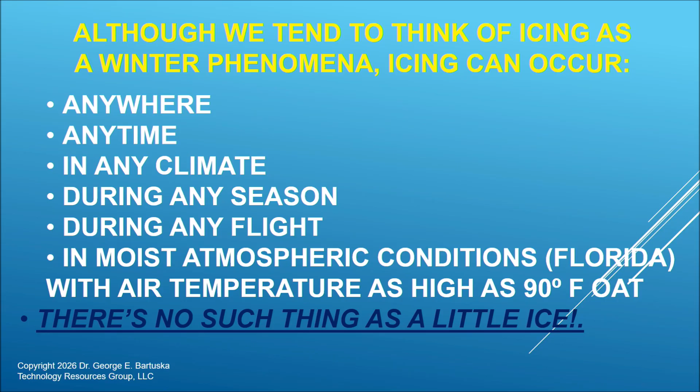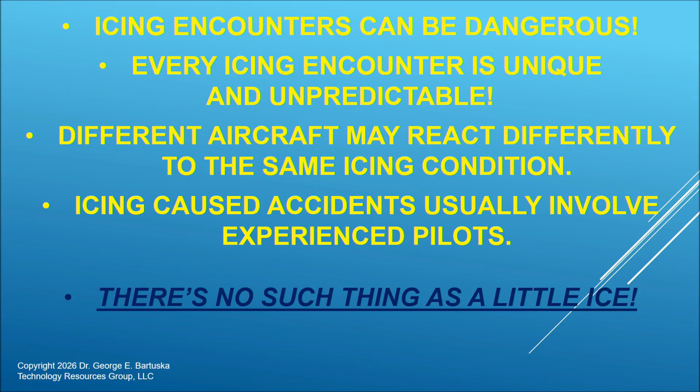Icing encounters can be dangerous. Every icing encounter is unique and unpredictable. Different aircraft may react differently to the same icing condition. Icing-caused accidents usually involve experienced pilots. There's no such thing as a little ice.

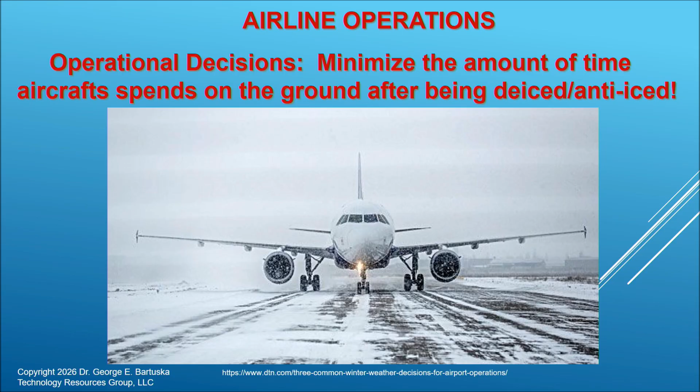Now the airlines, they just want to get going as soon as they can. They minimize the amount of time they're on the ground after being de-iced and getting their anti-ice systems running. But in the case of general aviation, you, the pilot, have complete responsibility for the go, no-go decision to fly based on your training and the best information available.

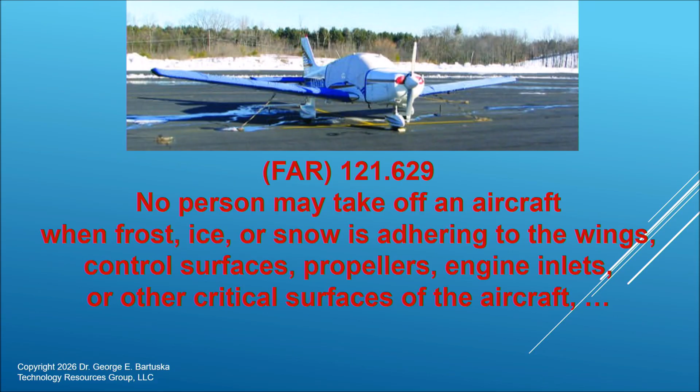We need to quote FAR 121.629: No person may take off an aircraft when frost, ice, or snow is adhering to the wings, control surfaces, propellers, engine inlets, or other critical surfaces of the aircraft.

As was illustrated in the NAFI Summit in 2023, there are 1,200 accidents average a year. Of those, 220 are fatal. Weather is a factor in a quarter of all those accidents. However, you can miss every weather question on the FAA exam and still pass, at least at the time this presentation was created. Too many times there are informal discussions like, well, we'll figure it out on the way.

Remember, if things don't look right, if you're hesitant, park the plane and take the train. Or when in doubt, sit it out. There are gaps in weather knowledge in the general aviation community. You need to learn the weather before it's too late, and that's one of the reasons we're here.

Now, I always quote John and Martha King from the King Schools. They always share this story when they talk in public. They were flying their Cessna 210 in the winter to Sioux Falls. They had a generator failure. They didn't stop to get it looked at. After flying almost 4 hours above the clouds with a dead battery, no radio, it started getting dark.

They had to put it down somewhere through an 11,500 foot overcast. They tried 3 times, experienced 3 icing episodes, started to worry about running into a TV antenna. Finally, they broke through the clouds, saw a highway, saw car lights, but saw a lot of power lines. So they ended up in an ice and snow covered cornfield, and luckily they lived. Later on, they found out it was just a loose wire, so if they had stopped, they wouldn't have had to go through any of that.

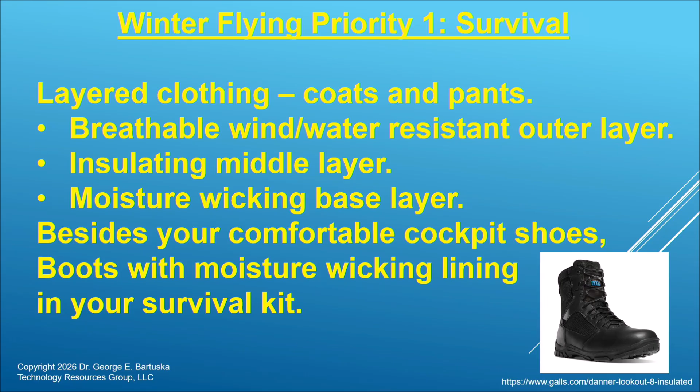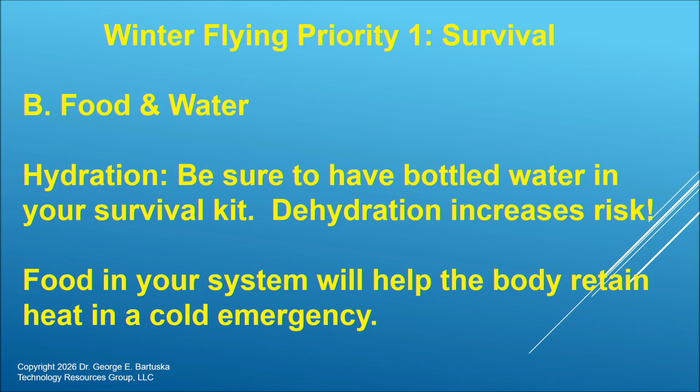Besides your comfortable cockpit shoes, make sure you have some boots with moisture wicking lining in your survival kit. Also make sure you have food and water. Hydration, be sure to have a bottle of water in your survival kit along with the other water you bring, and have food in your system to help the body retain heat in a cold emergency.

You want to make sure you have at least one fully charged cell phone, a flashlight with new batteries and extra batteries, some high energy food like protein bars and nuts, and some states, as we heard earlier today, like Alaska, have a specific requirement for what has to be in that survival kit.

Most of us have heard the 6 C's of survival. Number 1, have a cutting tool. Number 2, something to start a fire with. Number 3, something to make a tent, like a tarp. Some kind of container, like from your mess kit. Some kind of cordage, like 7-strand paracord. And in addition to the cell phone, something to communicate with, like a satellite phone, and a plastic mirror to serve as a signaling source.

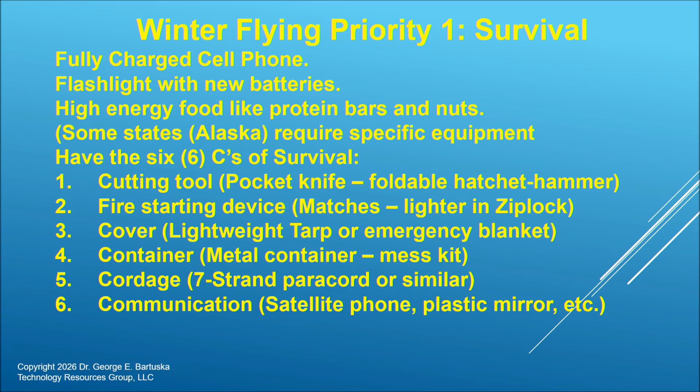Your pre-flight checklist. Check your tires. When it gets cold, the tires are going to drop in pressure. Snow and ice removal: make sure you have a brush on board and a scraper to handle any snow and ice. Aircraft openings: we're going to talk later about the pitot tube, the static ports, the heater, and the carburetor intakes.

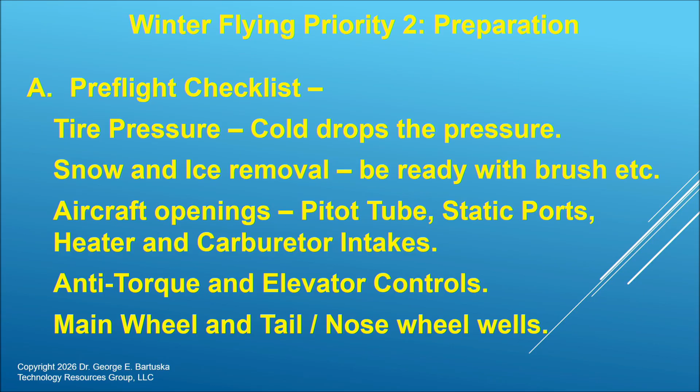Make sure the anti-torque and elevator controls are clear, and the main wheel and tail and nose wheel wells. Make sure they're clear. Now, static pressure ports.

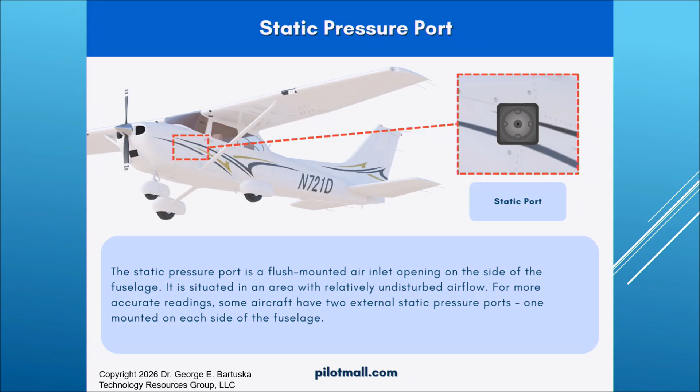The static pressure port is a flush-mounted air inlet on the side of the fuselage. It's situated in an area with relatively undisturbed airflow. For more accurate readings, some aircraft have 2 external pressure ports, one mounted on each side of the fuselage. Make sure during your pre-flight walk-around that you check that static port, that it's not blocked.

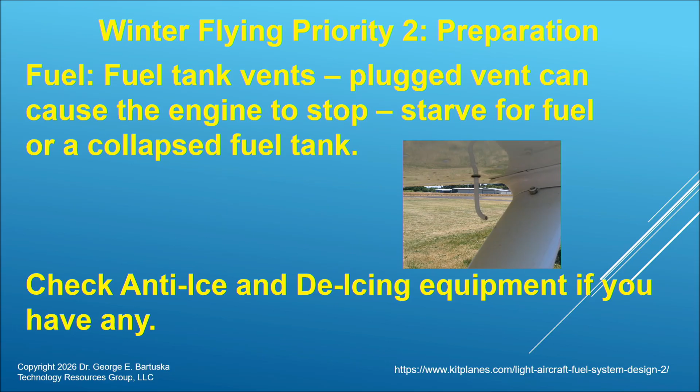Fuel tank vents: make sure the fuel tank vent isn't plugged, because it can cause the engine to stop, it can starve the fuel system, and even collapse the fuel tank. And as we talked about last time, if you have anti-ice and de-icing equipment, make sure that it's operable.

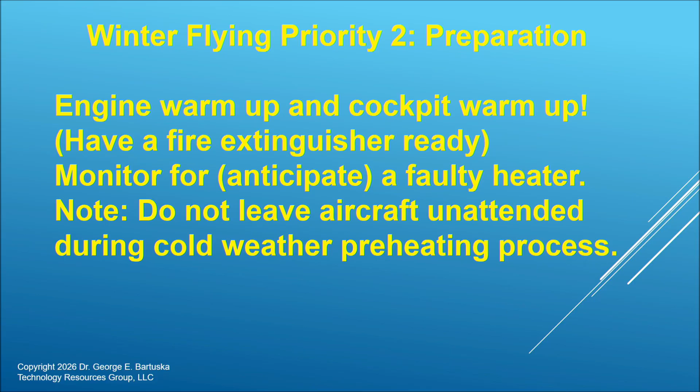Winter flying priority number 2, preparation. Engine warm-up and cockpit warm-up. Have a fire extinguisher ready, monitor for or anticipate a faulty heater. Do not leave the aircraft unattended while you're doing cold weather preheating processes.

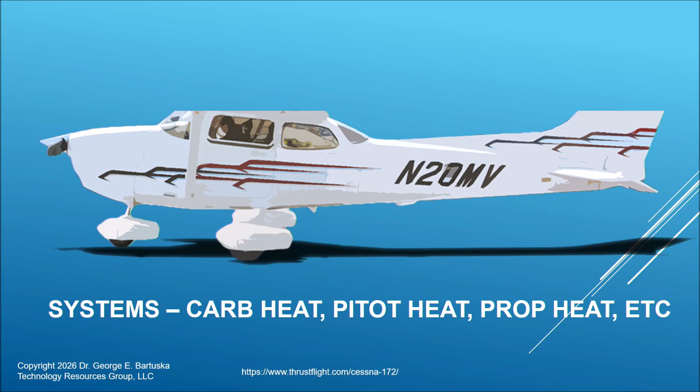Now, there's no such thing as a little ice. Up to now, we've talked about primarily the flight control surfaces and the wing. Now we're going to talk about everything but the wing: the carb heat, the pitot heat, and the prop heat.

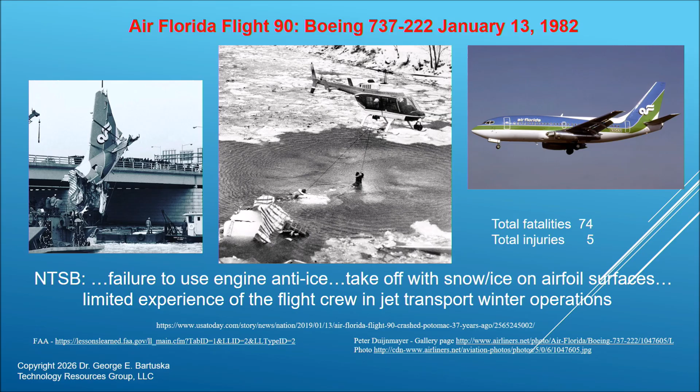First, I want to mention 2 accidents that show the importance of knowing icing. Air Florida Flight 90, a Boeing 737, on January 13, 1982. The National Transportation Safety Board concluded there was a failure to use engine anti-ice, a takeoff with snow and ice on the airfoil surfaces on the wings, and the limited experience of the flight crew in jet transport winter operations. Then there was the Scandinavian Airlines MD-81 crash, 27 December 1991.

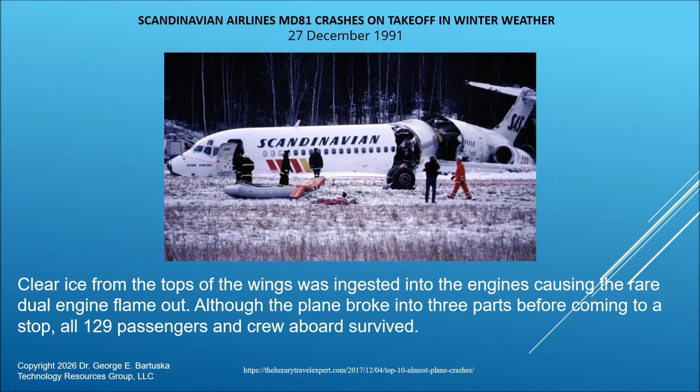Clear ice from the tops of the wings was ingested into the engines, causing a rare dual engine flameout. Although the plane broke into 3 pieces before coming to a stop, all 129 passengers and crew survived. The crash was cushioned by the fact the aircraft came down in the tops of trees and then into a snow-covered field. Now, first I want to talk about carburetors.

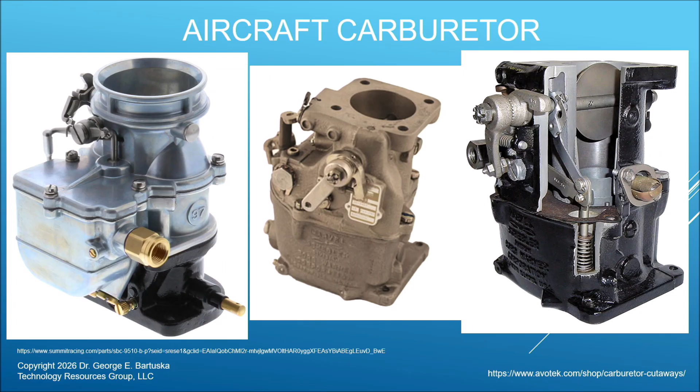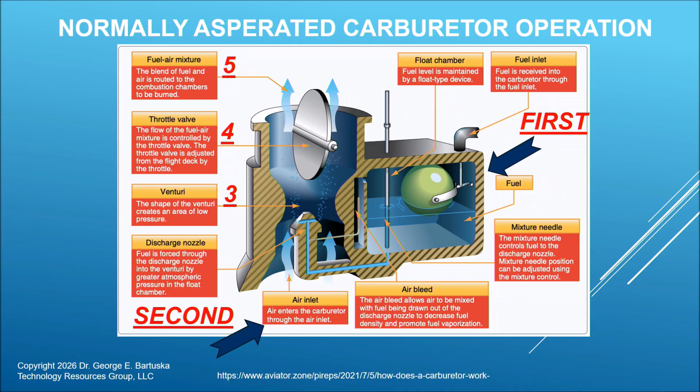At one time, all planes had carburetors, just like all automobiles had carburetors, and we want to talk about the operation of the carburetor. The carburetor itself has a float bowl, as we see in that picture, and I'm going to hold this up. Here's the carburetor, and I'm taking it apart. Inside here is the float bowl, and there are the floats.

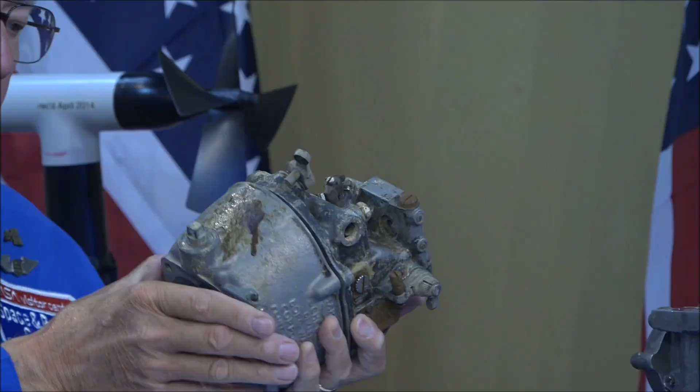Okay. Now, the float maintains a level of liquid in the float bowl, and the next thing is the air inlet. Now, this happens to be an updraft carburetor, so it's mounted like this, and the air comes in from the bottom, but it can be a downdraft, an updraft, a side draft. Aircraft carburetors usually came in all kinds of configurations.

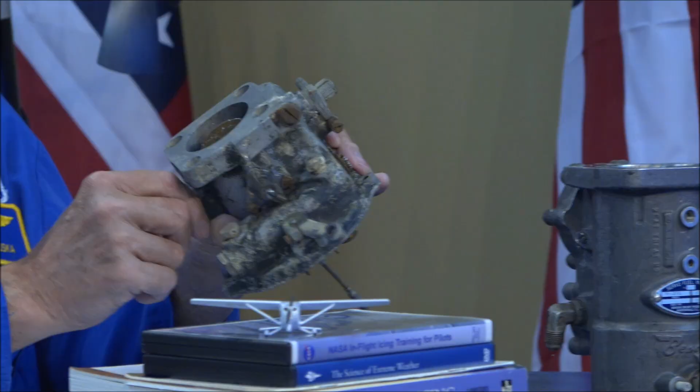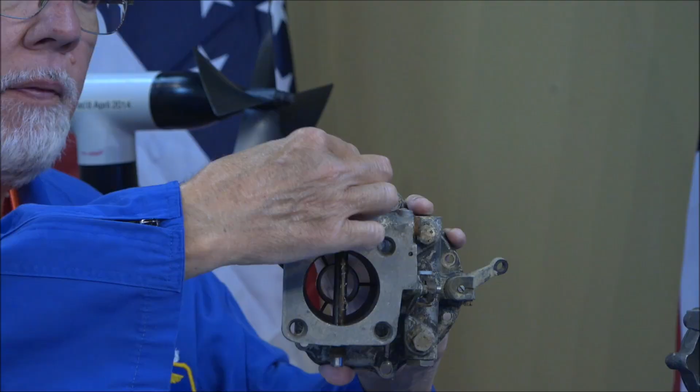And that air inlet has a venturi. And if I pull this off again, you can see right here the venturi. This is the part that's going to create the low pressure so it can suck the fuel out of the float bowl. Next, the throttle valve. The throttle valve is this plate on the top. That's how you're controlling the throttle. When you pull the throttle out on the instrument column, that's what's controlling the RPM of the engine, the throttle valve.

And then we have the fuel-air mixture. Once the fuel gets pulled out of the float bowl and starts to mix with the air, we get a fuel-air mixture that's a blend that goes on to the combustion chambers. Okay. Now, the carburetor induction system can lower the air temperature as much as 60 degrees Fahrenheit. With enough air moisture, ice can form on the inside of the carburetor on the throat walls and the throttle plate, gradually cutting off airflow to the engine.

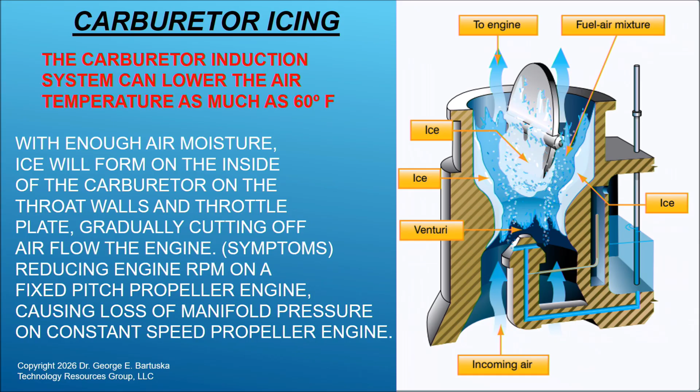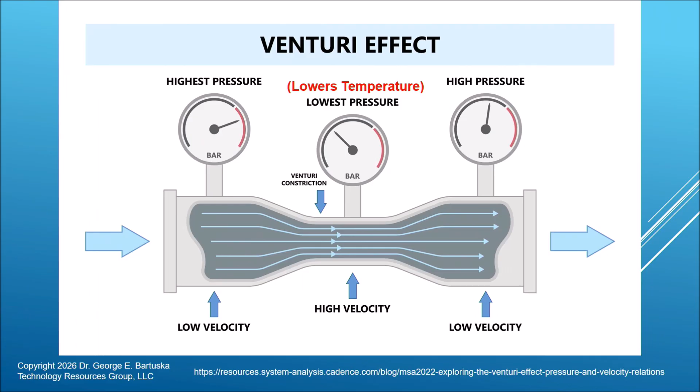What are the symptoms? A reduction in engine RPM on a fixed-pitch propeller airplane, or a loss of manifold pressure on a constant speed propeller engine, in addition to the rough-running engine. As a review of the Venturi effect, when the flow gets restricted, like in the middle, the velocity will increase, but the pressure will go down. But when the pressure goes down, the temperature also goes down.

Now, if water vapor in the air condenses when the carburetor temperature is at or below freezing, ice may form on internal surfaces of the carburetor, including the throttle valve itself, the part you're controlling the RPM with. The reduced air pressure as well as vaporization of fuel contributes to the temperature decrease in the carburetor.

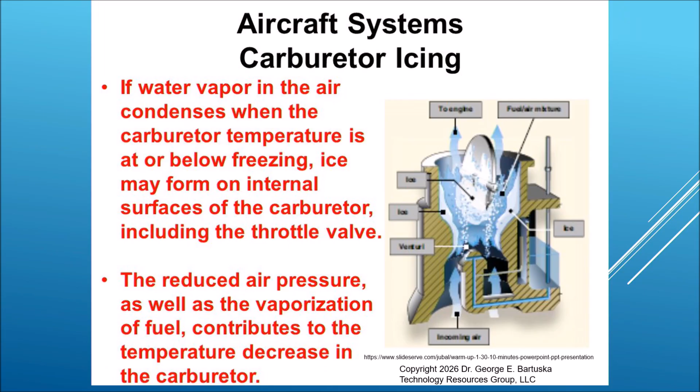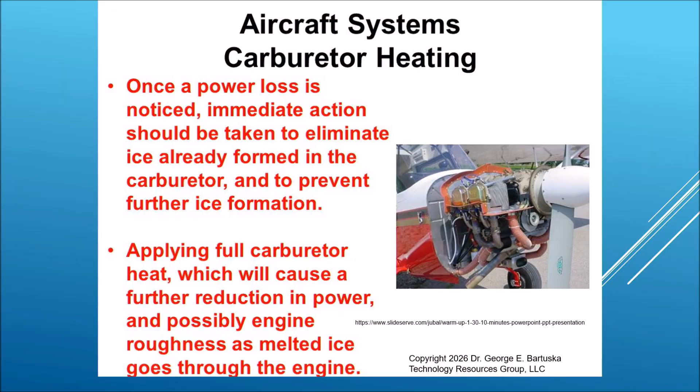Once power loss is noted, immediate action should be taken to eliminate icing already formed in the carburetor and to prevent further ice formation. Applying full carburetor heat will cause a further reduction in power and possibly engine roughness as the melted ice goes through the engine. And here's a little quick schematic that shows that. We're going to show it again here in a minute.

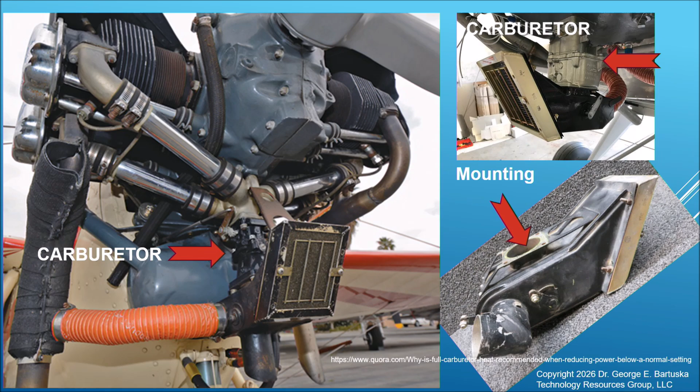Now here's an actual carburetor mounted on an actual aircraft engine. You can see there where the red arrow is, it's an updraft carburetor, and at the top are the intake manifolds going to the cylinders. In the upper right-hand corner, you can see another carburetor mounted with the air screen in front of it, and on the lower right, you can see what the mounting looks like for the carburetor. Now, the carburetor heat system routes hot air into the air induction system, melting any ice and preventing any new ice from forming.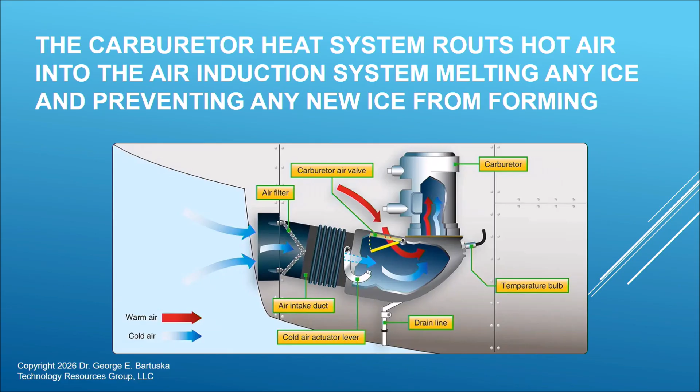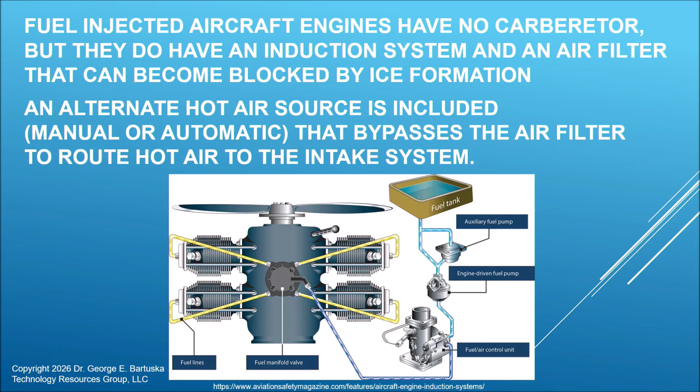Fuel-injected aircraft have no carburetors. What do they have? They have this guy. They have what's known as a throttle body, and if we look in there, we can see that there's no Venturi. There's no Venturi because that's taken over by the fuel injection system, but there's still a throttle body that can ice up. Okay? So an alternate hot air source is included, manual or automatic, that bypasses the air filter and routes hot air into the intake system.

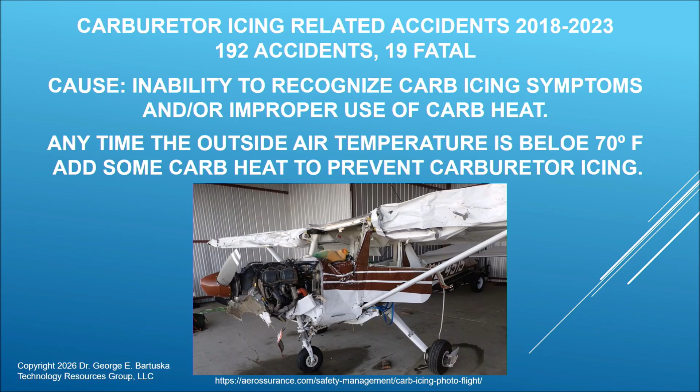Carburetor icing related accidents between 2018 and 2023. There were 192 accidents. Of those, 19 were fatal, and the cause was the inability to recognize the carb icing symptoms and improper use of the carb heat. They didn't put the carb heat on fast enough. Anytime the outside air temperature is below 70 degrees, you should add some carb heat to prevent carburetor icing.

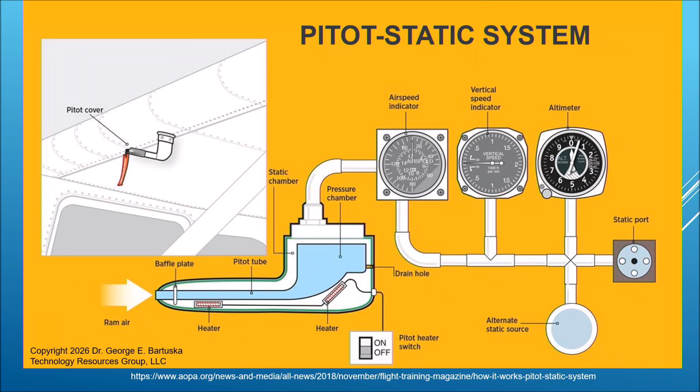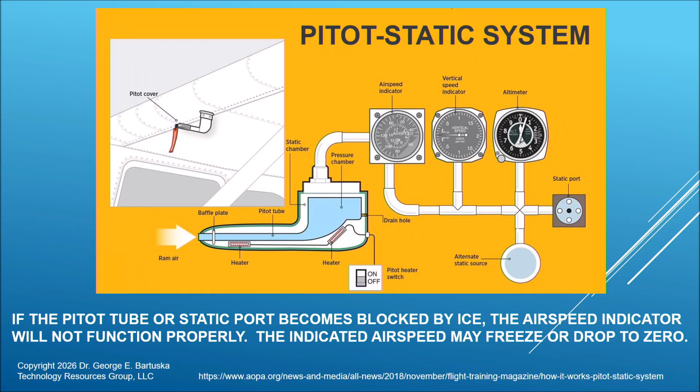Now let's talk about the pitot tube. The pitot tube is part of the pitot-static system. It's connected to the airspeed indicator, to the vertical speed indicator, and to the altimeter. If the pitot tube or static port becomes blocked by ice, the airspeed indicator will not function properly. The indicated airspeed may freeze or drop to zero. So make sure you have the pitot heat turned on.

Icing of the propeller generally makes itself known by a slow loss of power and a gradual onset of engine roughness. The ice first forms on the spinner or propeller dome and then spreads to the blades themselves. Ice customarily accumulates unevenly on the blades, throwing them out of balance.

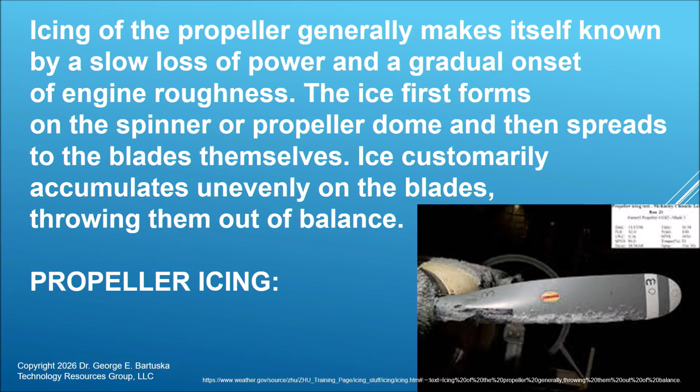So, for winter operations, just before takeoff, you should have an anti-icing checklist. That means you're going to make sure you have the pitot heat on. If you have windshield heat, make sure that's turned on. And if you have propeller heat, make sure that's turned on.

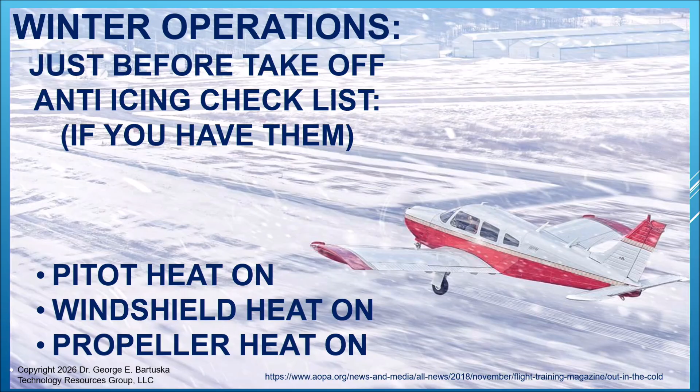Now, general aviation aircraft often fly at altitudes conducive to atmospheric icing conditions. So remember, aviate, navigate, communicate. If you encounter icing, consider contacting air traffic control and see if you can climb above the clouds if possible, or descend to warmer air if possible, or divert to another location, or turn around to where you came from in the first place, or declare an emergency with air traffic control. Remember, do not stall the aircraft. Make a controlled descent, possibly to an off-field landing.

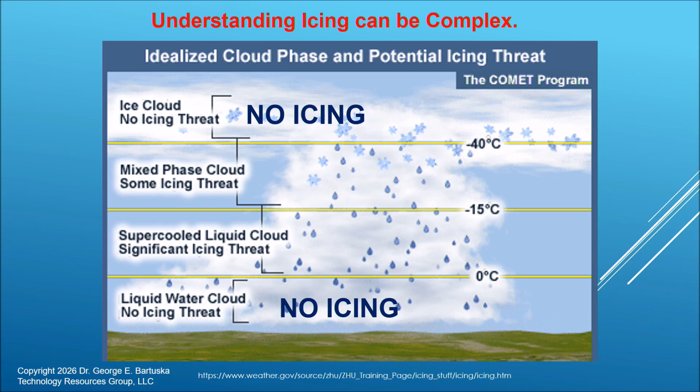Excuse me, this is the picture I show in all the seminars on icing. This is from the National Weather Service COMET program. So what it's showing us is if we're low enough and the temperature is warm enough, we're not going to get icing. If we're high enough, like in a corporate jet or an airliner where there's no liquid water, we're not going to have icing. But most icing occurs between 3,000 and 15,000 feet, and that's where most general aviation airplanes are flying, where there's supercooled water that we talked about last time, and we can get clear ice, we can get rough ice, I can't think of the name right now, and mixed icing.

Wet snow poses the same hazard as ice. Climb, descend, or divert to get out of that area. So what can a pilot do to avoid or mitigate potential wet snow conditions? Fully comprehend the potential for icing in these conditions, especially when the outside air temperature hovers around freezing and wet snow is possible. Keep in mind that a cloud that can produce snow could also contain supercooled liquid water.

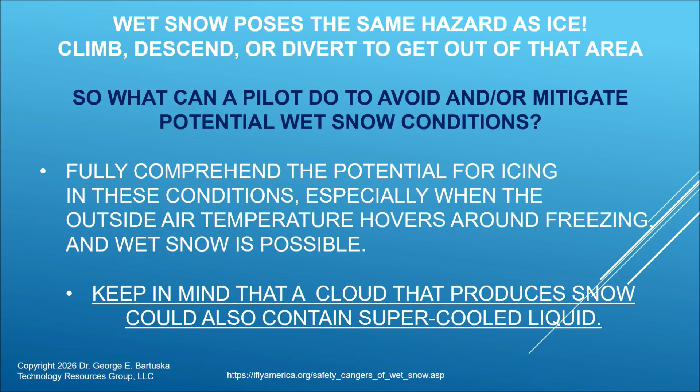So in summarizing, do a good job of pre-flight planning during the winter. Get the weather briefing from the FAA and from the flight service station and from anywhere else you can get weather information to your destination and to your alternatives. Do a significant walk around and fuel check, then do an engine warm up, and then go by your checklist.

And remember, regarding carb heat, know the warning signs of carburetor icing for your aircraft. For a fixed pitch propeller, that's a loss of RPM. For a movable propeller, that's a drop in manifold pressure and rough running. Your response to carb icing is to apply carb heat as fast as you can.

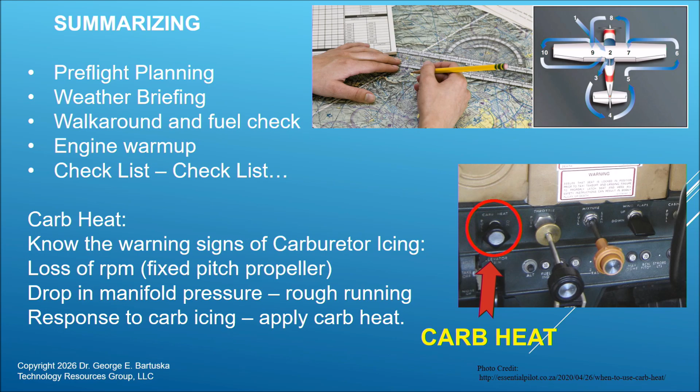Now as a review, weather is a difficult subject in the flight training curriculum. Weather is a factor in about 1/4 of all aircraft accidents. The presentation emphasized that, quote, there's no such thing as a little ice, unquote. Carburetor heat is used to address carburetor icing. Your winter flying pre-flight checklist should include checking the tire pressure, because cold weather drops the pressure in the tires.

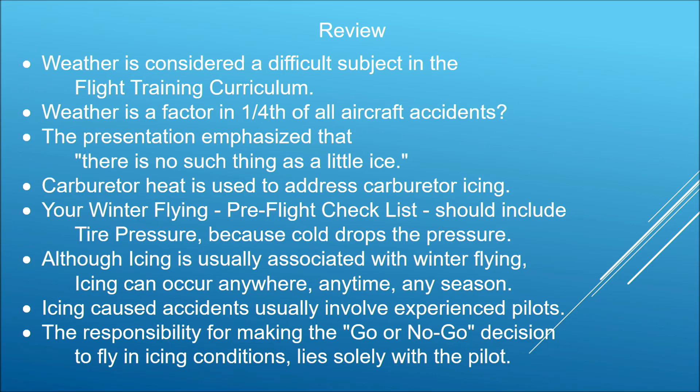Although icing is usually associated with winter flying, icing can occur anywhere, anytime, during any season. Icing-caused accidents usually involved experienced pilots. The responsibility for making the go/no-go decision to fly in icing conditions lies solely with the pilot. The Venturi effect in the carburetor causes reduced pressure and reduced temperature, which makes it more susceptible to icing.

FAR 121.629 states that no person may take off an aircraft with frost, ice, or snow on the wings, propeller, or control surfaces. Fuel-injected aircraft have no carburetor. However, icing is still a significant hazard for the air induction system and the throttle body. An emergency onboard winter survival kit should include extra coats and pants, boots with moisture wicking lining, and food and water.

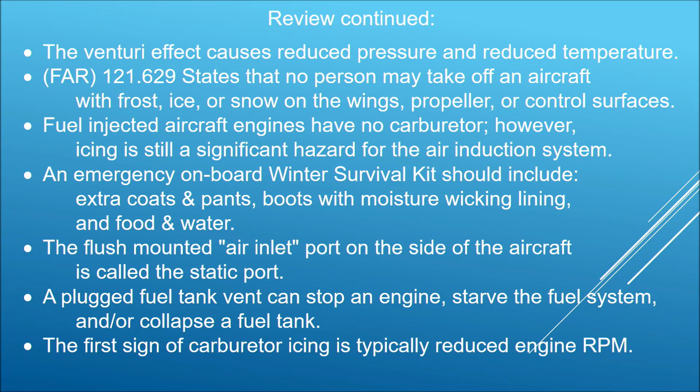The flush-mounted air inlet port on the side of the aircraft or both sides of the aircraft is called the static port and must be checked before taking off. A plugged fuel tank vent can stop an engine, can starve the fuel system, and/or collapse the fuel tank. The first sign of carburetor icing is typically reduced engine RPM followed by a rough engine. So that's our presentation on icing.